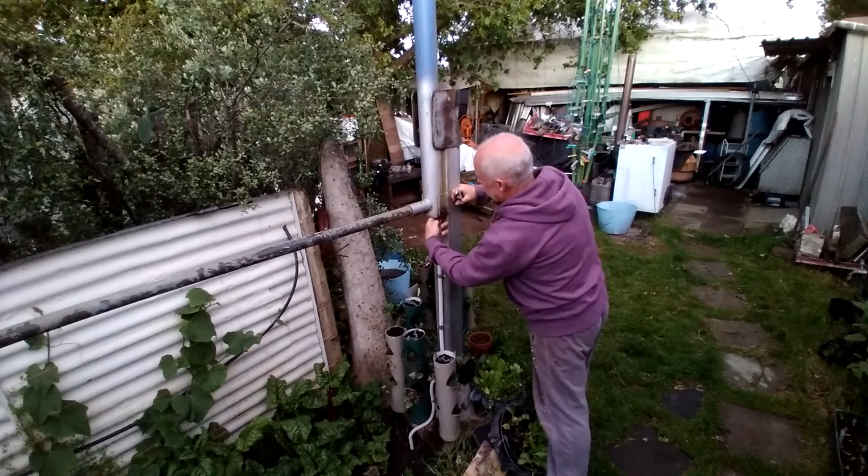One of the mast's guy ropes becomes the lowering rope. The other 2 guy ropes have been disconnected, and now I'm getting the pin ready to take out. I won't remove the pin until I've got everything connected, because if a big gust of wind was suddenly to come up and the pin was out, the whole thing could come crashing down.

So loosen the pin, get it ready to take out, connect up the 2-ton cable winch to the mainstay and take up the slack, and then I can just give it a push with my hands and the mast will start to tip, putting pressure onto the cable winch, and I can lower it the rest of the way with the cable winch with no risk at all.

Trust me, if this was dangerous, I would be down in my concrete bunker down the end of the street with all the neighbours. When I do anything dangerous, I gather everybody into my concrete bunker and we watch it all on the monitors while I get my clone to do the dangerous work. You'll see the clone being built in one of my earlier videos, I'm not going to tell you which one, you'll just have to go look. If it wasn't for the YouTube safety police who randomly roam the comments section of all the videos, I wouldn't have had to build the concrete bunker and gather all the neighbours to watch everything on the monitor while my clone does the work, because I could just do as I like. But because of the YouTube safety police, I have to take all these precautions.

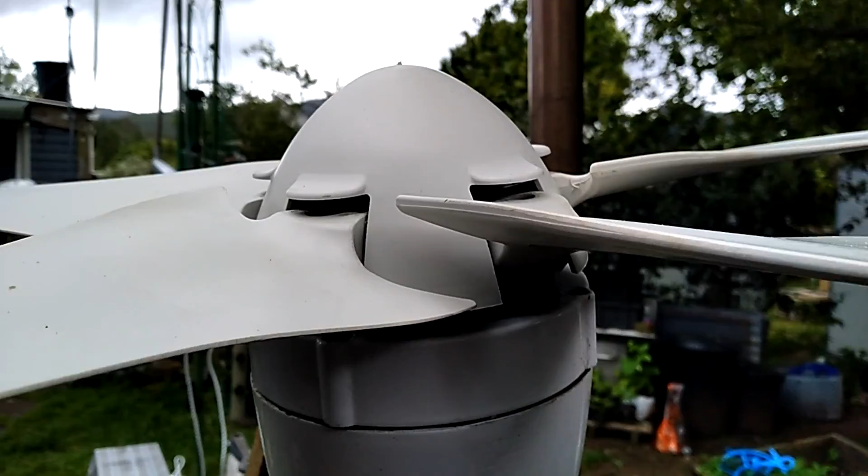So here we go. The first thing to do is pop off the plastic cover, which is done by releasing the clips underneath. On the 5-bladed prop cover there are 5 clips to undo, and on the 3-bladed there are 3 clips. Remove that, put it in a safe place, and grab the large Allen key.

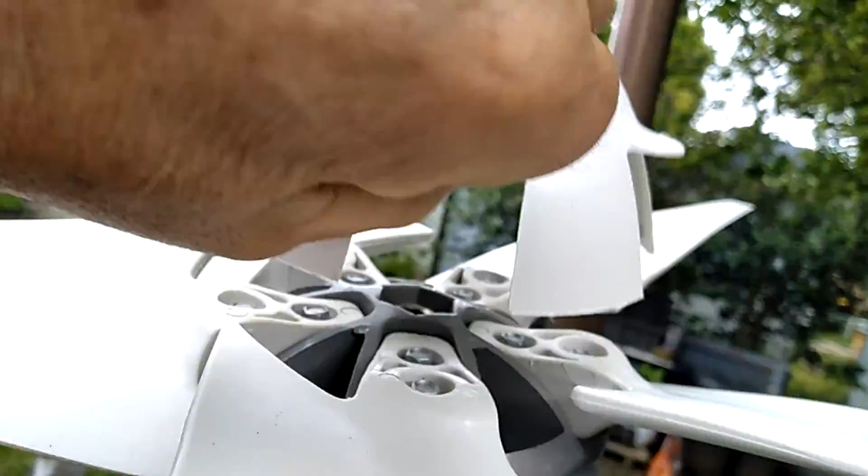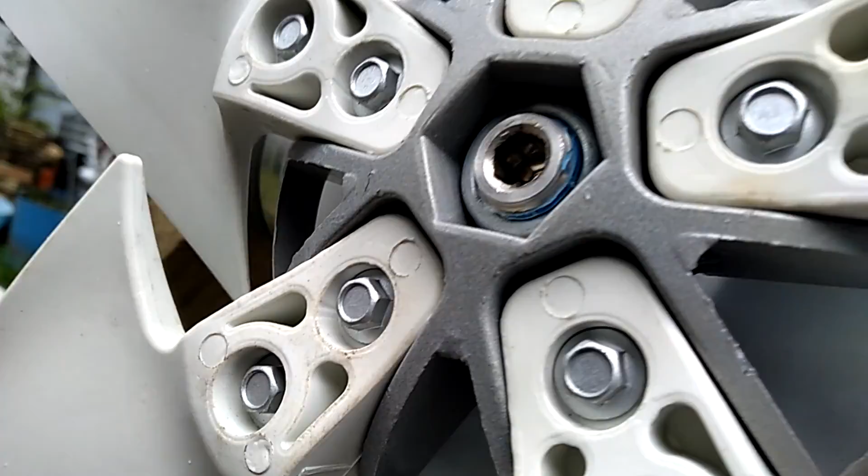Now we're going to remove the rotor. Because we're turning the shaft, not the nut, we have to turn it the opposite way. Instead of righty-tighty, lefty-loosey, it'll be righty-loosey, lefty-tighty. So turning it to the right, I'm actually loosening it because I'm winding the shaft back down inside the nut.

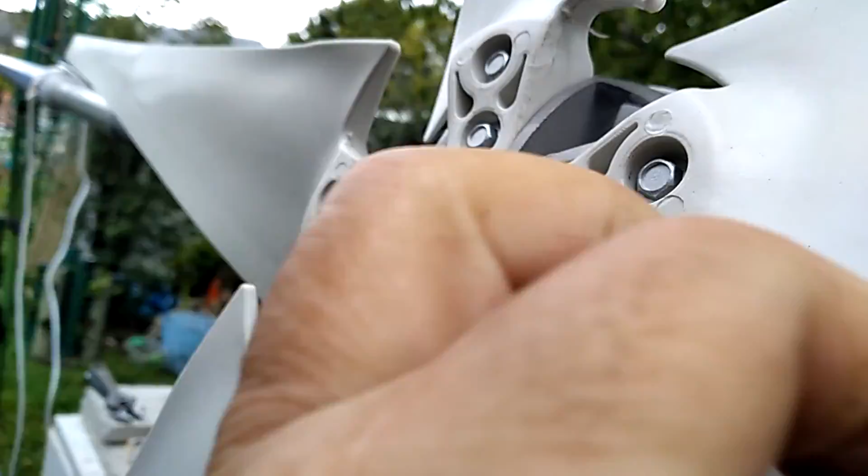Really easy to work on.

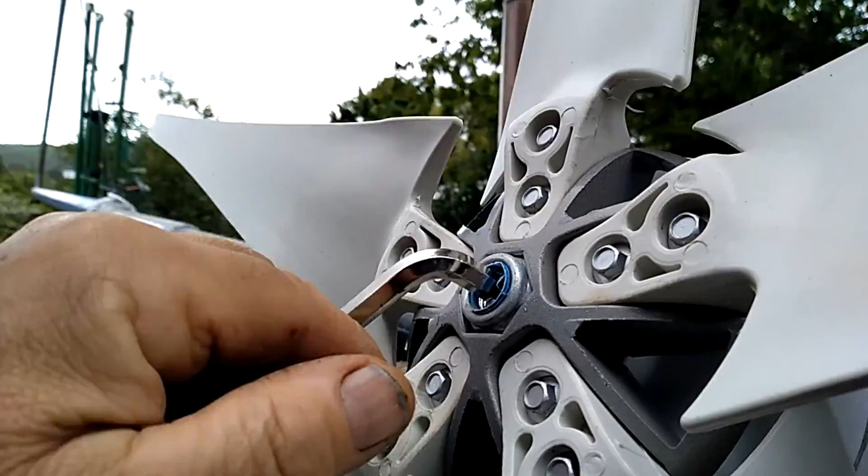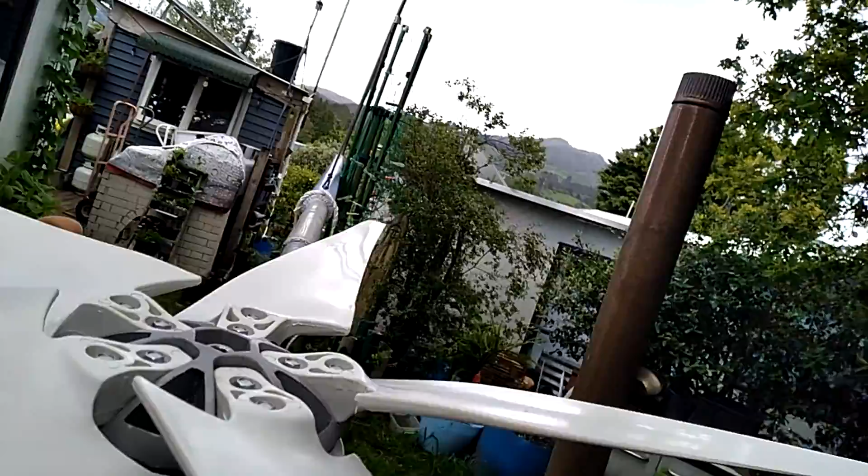So the blade and hub assembly can get lifted off and put down somewhere where it won't get kicked, knocked, driven over or stood on, because it's a fairly well balanced piece of machinery and I really don't want any upsets.

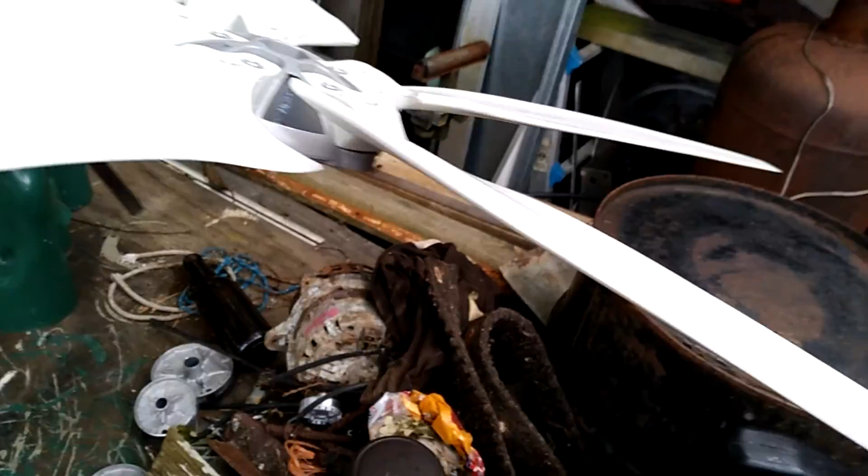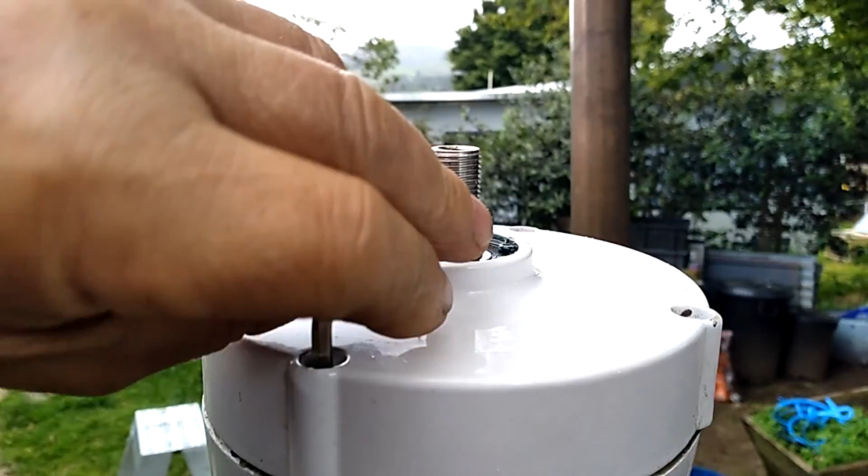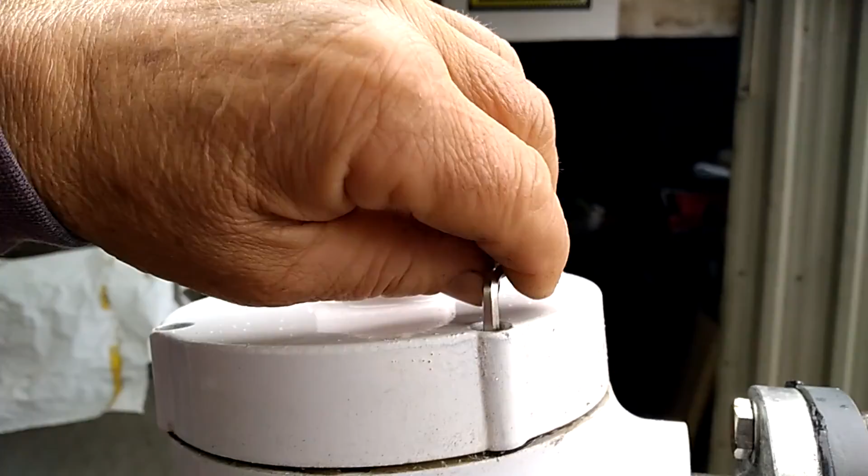Now I'm going to select the 5mm Allen key, which is going to remove the actual stator, and from the stator I'll be able to push the rotor assembly out. Once you've removed those 4 screws, there's an O-ring that goes all the way around, and you must make sure that O-ring stays in the correct position on the outside of the bolts.

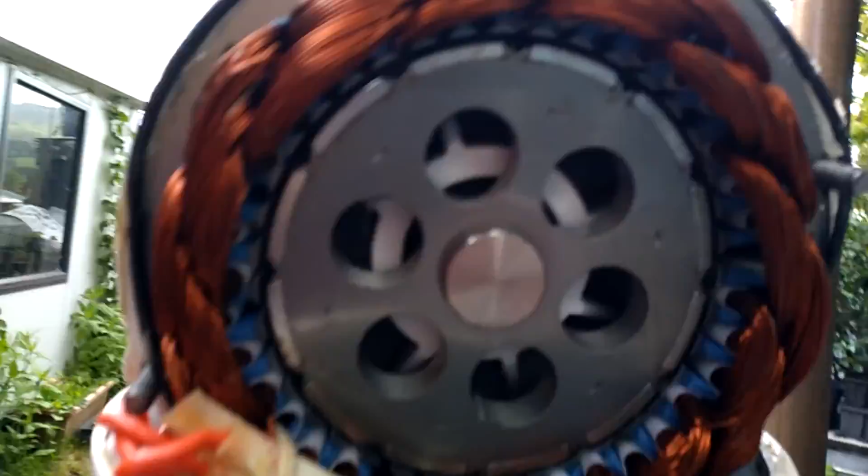Here's the rotor sitting inside the stator. It runs fairly close to the coils - the closer the better. Now you can see the magnets on the outside of the rotor. We can't fit any extra magnets on the outside of the rotor, but we can fit magnets, so long as they're no more than 5mm thick, to both sides of the rotor.

So you just pull the rotor out. That's only held in there by the magnetic force, so you just push against the magnets.

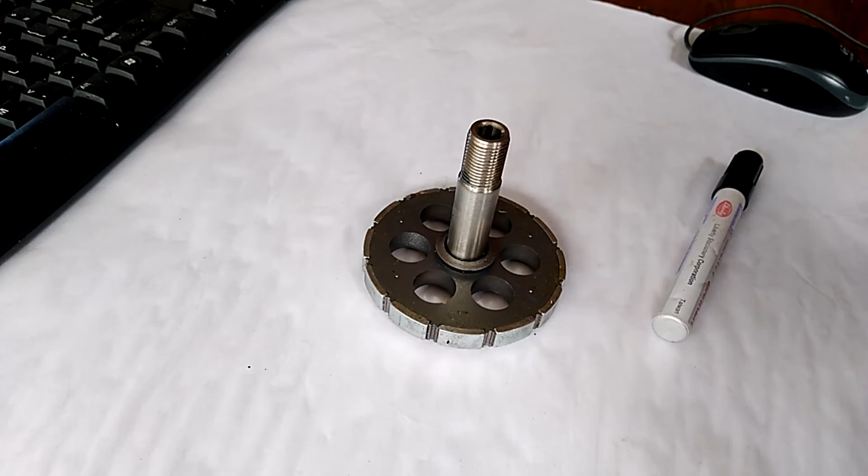Now, I would like to pay tribute to... so right now I would like to pay tribute to the patience and the kindness of all those people who were really excited that I was going to be doing this project, and have waited patiently for several months while I firstly get the thing up the pole, because I've been very busy doing other things, and secondly while they wait for me to get my baseline figures.

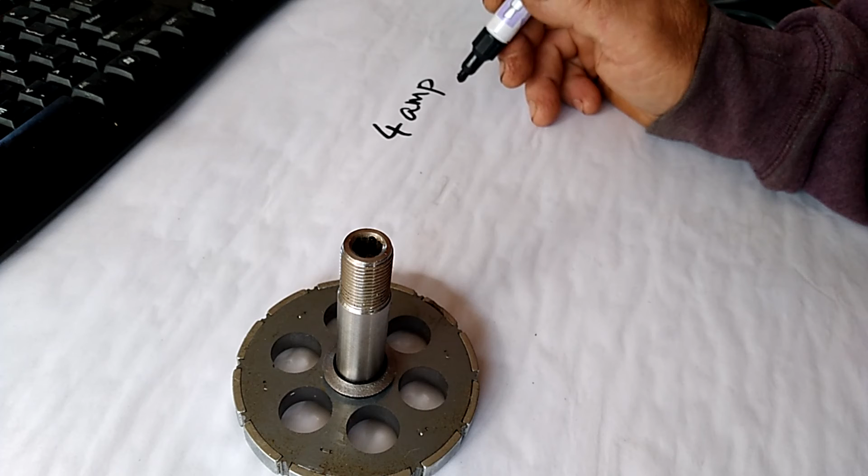Now the baseline figures are nothing exciting. The most I got out of this thing at any stage was a 4 amp charge, and that's nothing spectacular. It was occurring at the stage where the blades were beating the standing wave from the previous blade as the whole thing revolves.

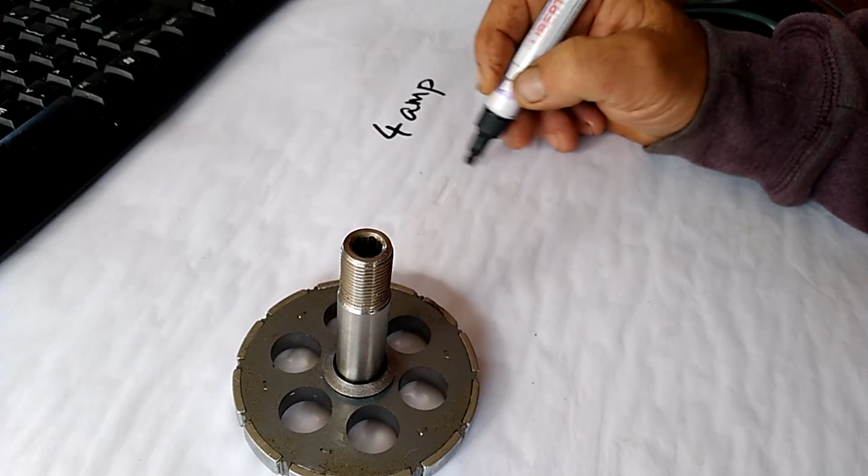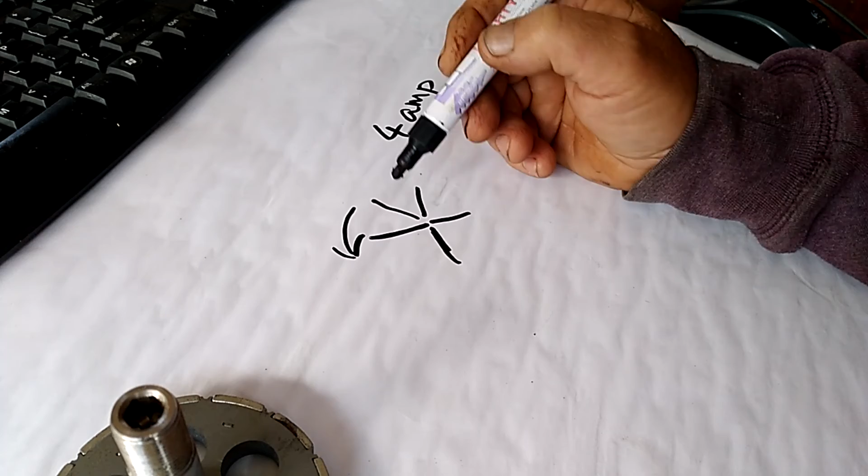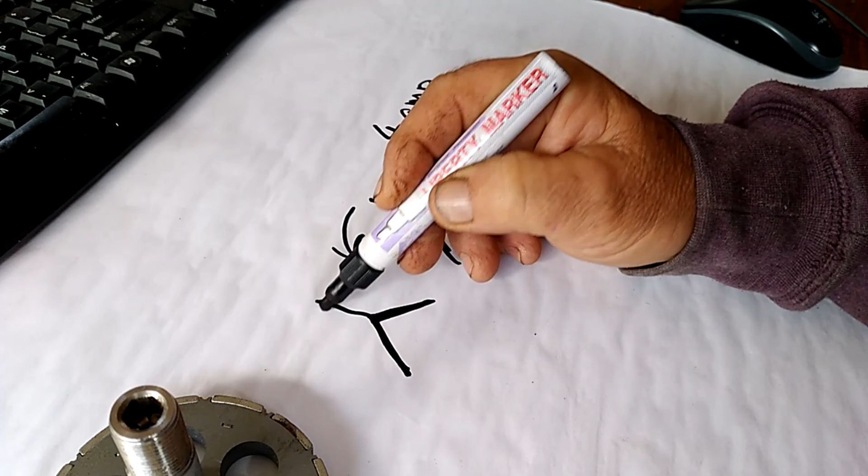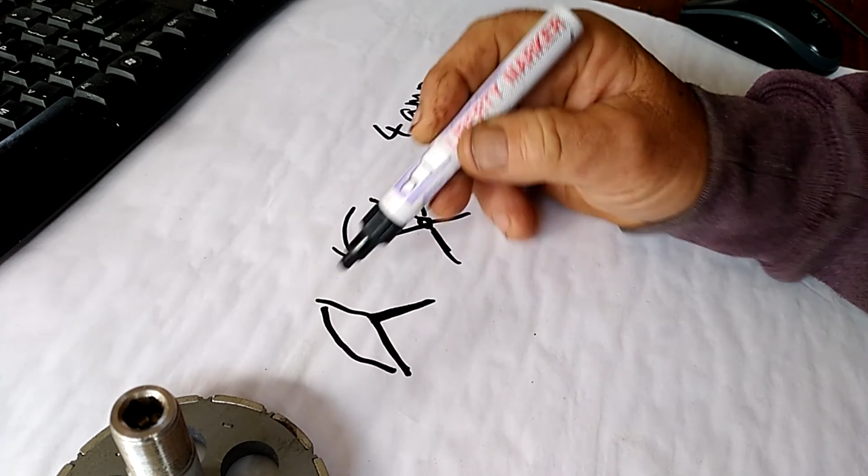Because what happens when you've got a 5-bladed turbine rotating in this direction, for example, the distance between the blades is closer than on a 3-blade turbine, as you can see here. So because they're closer together, when the thing is revolving faster, it means the blade comes round and hits the wave of dirty air left by the previous blade, whereas on a 3-blade that happens at a much higher speed.

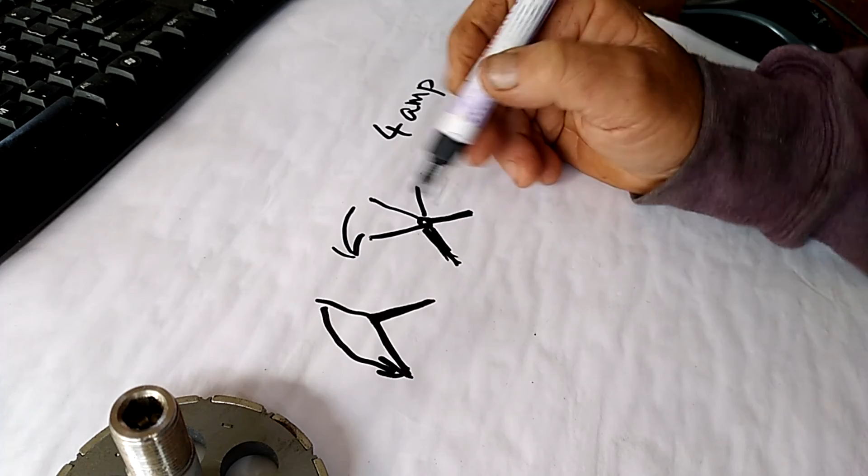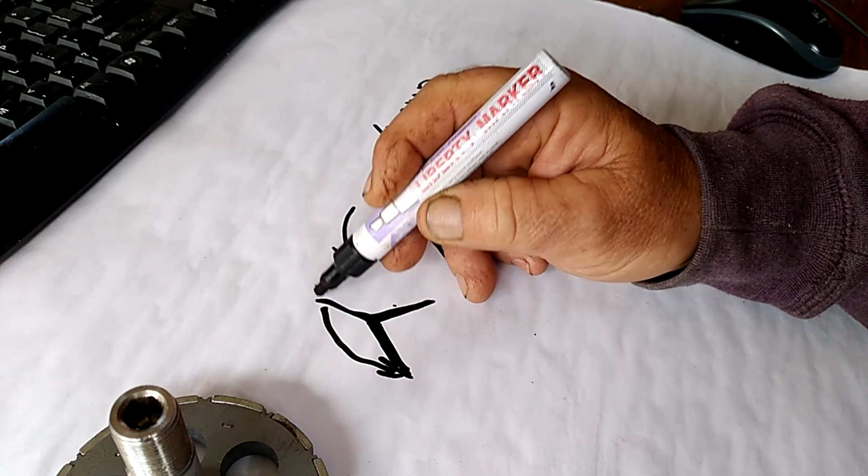So 5-blade is great for my garden where I've got a group of buildings and 2 or 3 really mature trees. This type of configuration is going to go better in lower speed winds, whereas if you live on a yacht or the top of a hill or in a coastal area, you'll probably get much better results with a 3-blade.

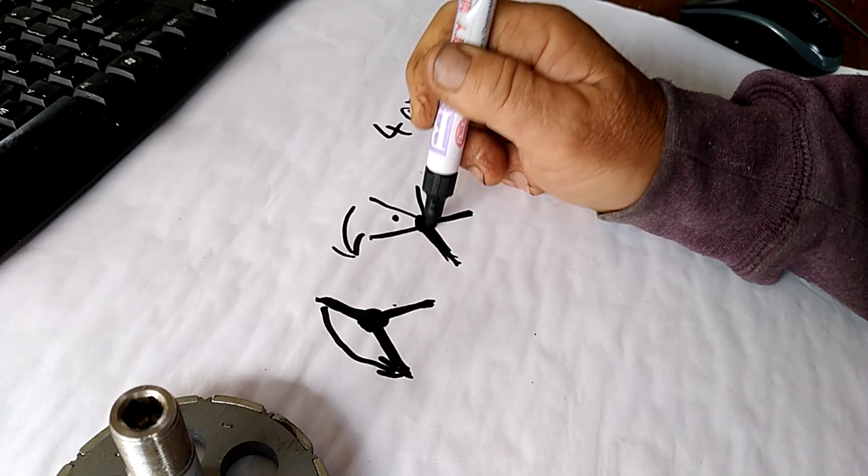I did in fact order a new 3-blade hub from a Chinese supplier who I don't recommend dealing with - I bought it through eBay, but it's not eBay's fault. The problem was that even though I ordered a 3-blade hub, they sent me a 5-blade, so I can't do anything with it. I gave them the option, silly me, to replace the hub with the correct one or give me a full refund, and they chose to give me the full refund. So now I've got to find another supplier and wait another 2 months to get the correct hub.

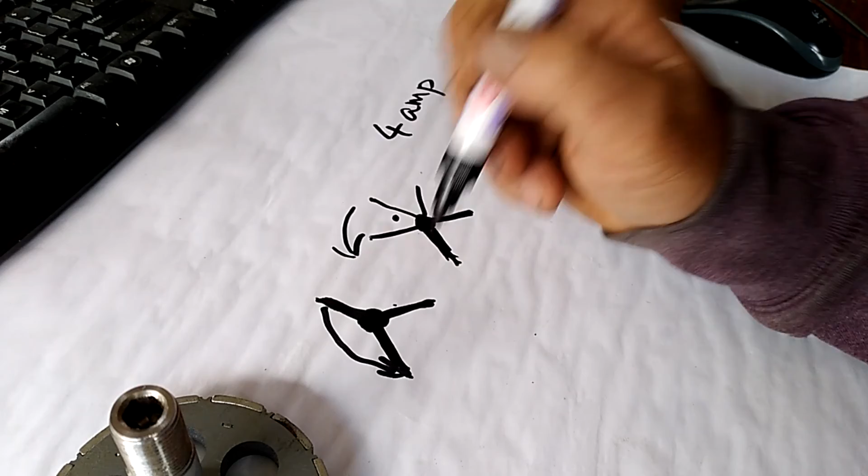So it will be coming down again, and I will be trying it out as a 3-blader, although I don't expect better results in my location.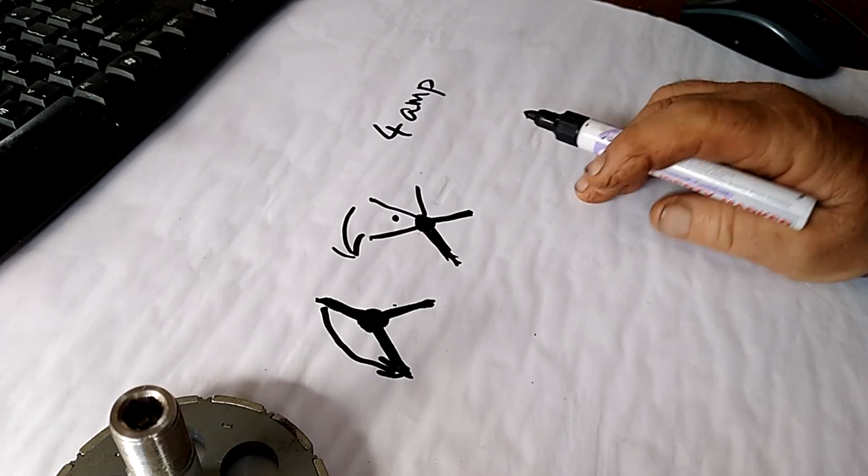So you did see a few minutes ago that the stripping down and removal of the rotor didn't require any special tools - I could do it with a rudimentary tool pack that came with the turbine. The only other tools I'm going to need for this are a texter to draw my little bits of information to explain what's going on, and a kid's compass.

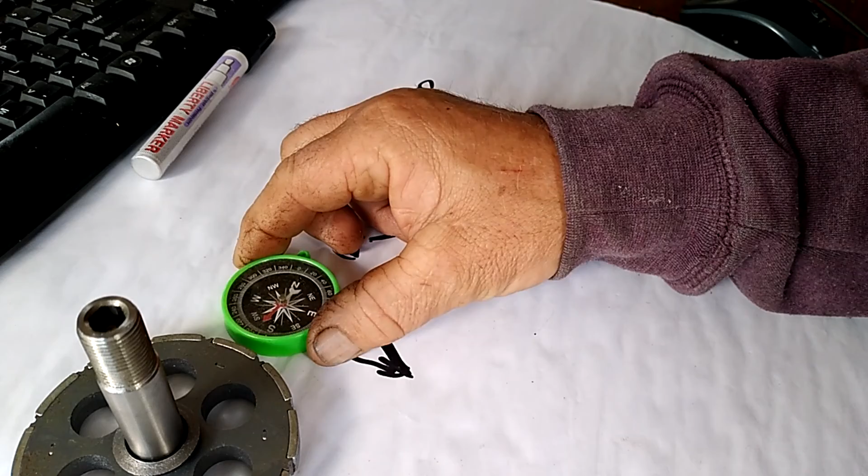And why have I got a kid's compass? That's because I need to find out the polarity of each of these magnets so that I can duplicate that polarity with the new magnets that I'm going to fit to this face here.

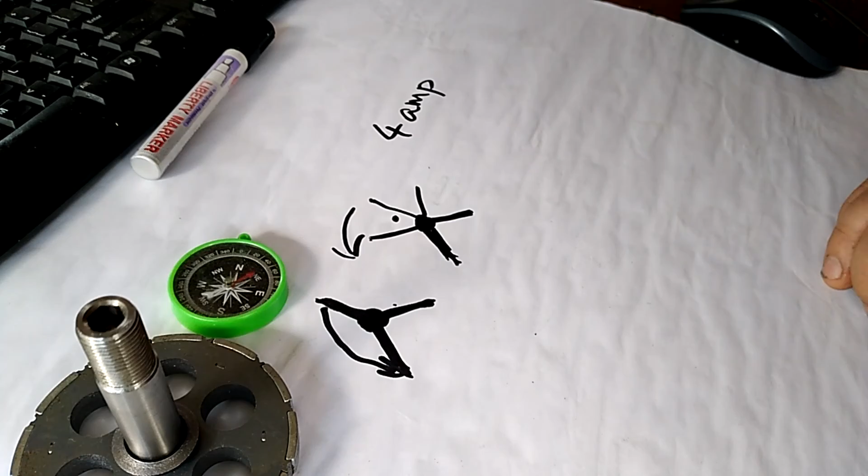Let me show you the new magnets. Now, once again, from eBay, I bought a stack of high-grade neodymium magnets.

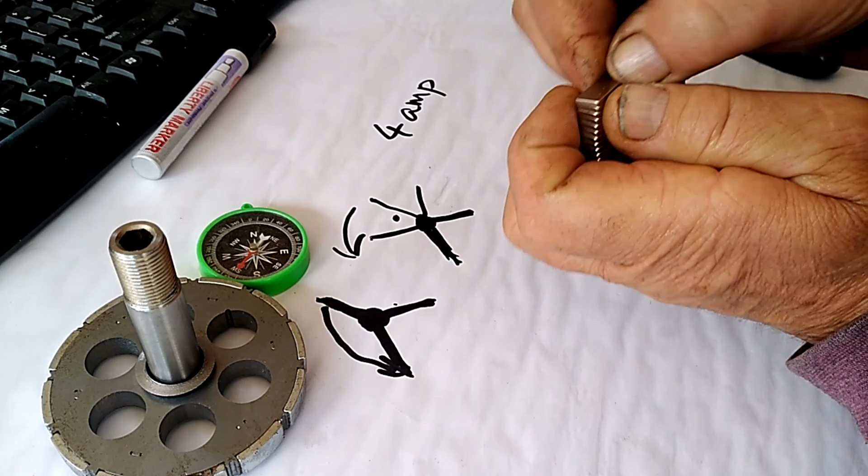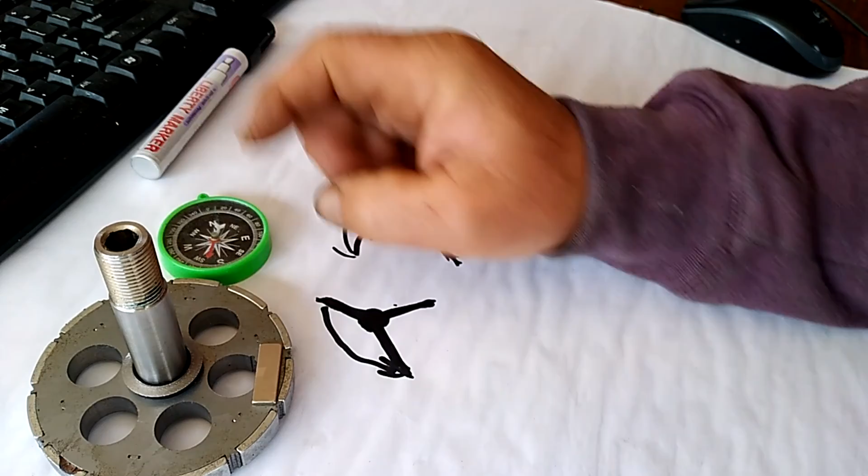I couldn't get the slightly curved type that they use here, but that doesn't matter because I'm going to be putting these magnets directly onto the face next to them. But of course they won't want to stick to the face, they'll want to move towards the magnet, so I'm going to have to give this a wipe down with some alcohol and use adhesive to glue each of these in the correct place.

Now, before we go any further, I want to show you in a close-up here how this rotor is marked all the way around with these dimples on both sides.

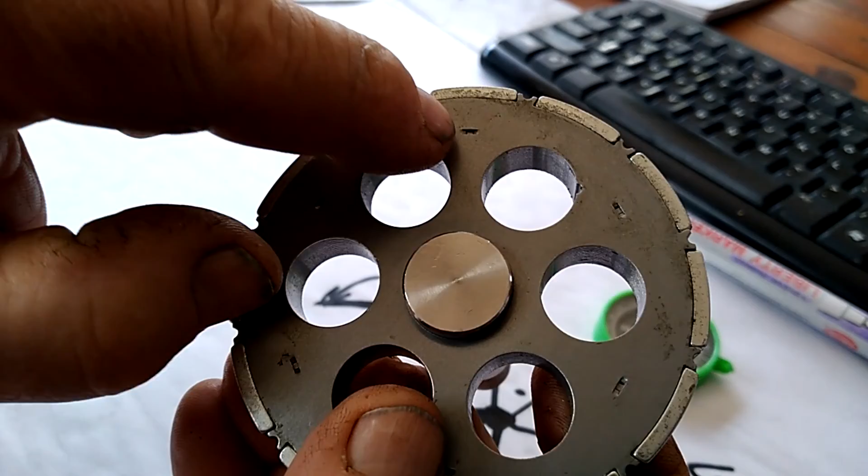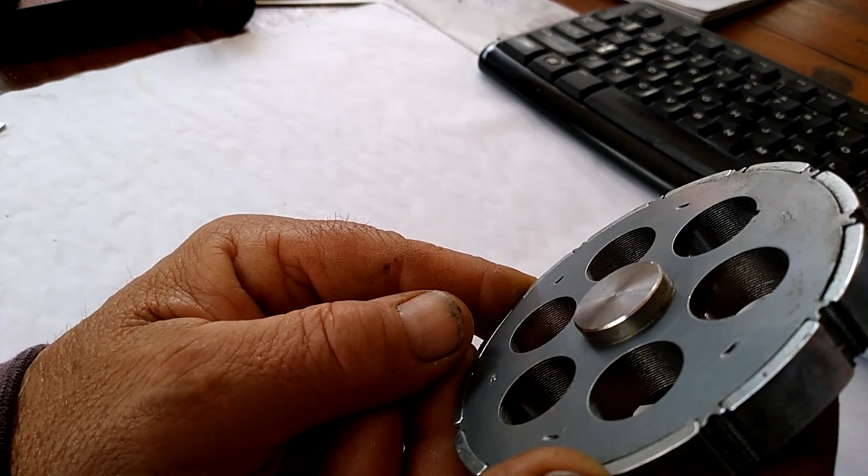And something else you'll see, if you look inside the grooves here, you can see that this rotor isn't made of one piece of steel. This rotor is made of a sandwich of many sheets of thin steel laminated together into a block. The reason they do this is to eliminate or vastly reduce what they call eddy currents.

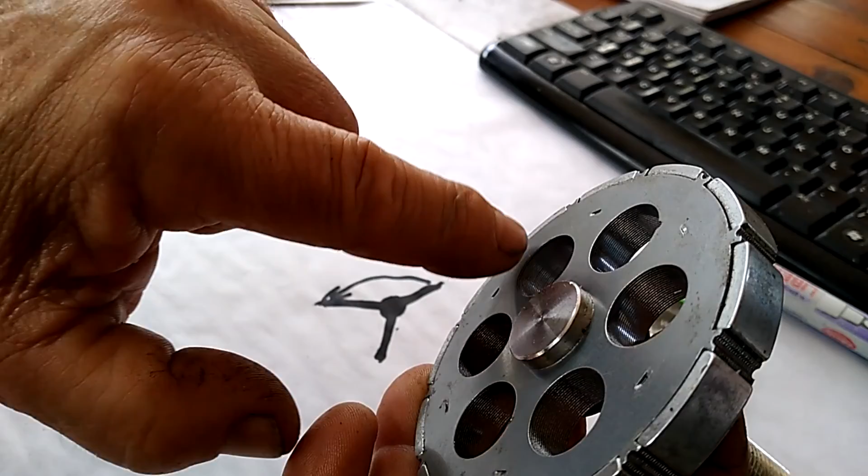Eddy currents are the lines of magnetic flux that go from pole to pole in each magnet. If this was one solid block of metal, the eddy currents would be massive. So they've taken the opportunity to reduce that by making it like a transformer, out of many laminations of steel, and that breaks up the eddy currents and means you don't get so much cogging. That's the feature of a very well-made appliance, that they haven't cut corners - they've used what appears to be best industrial practice.

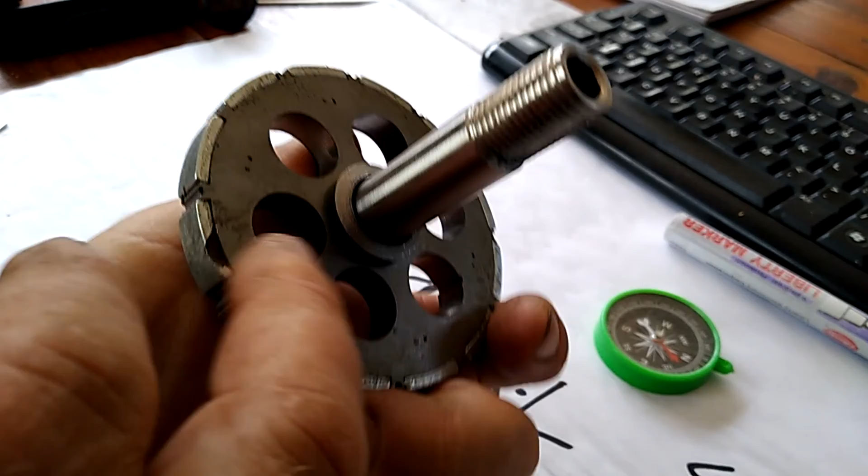Now you'll see that this collar, which has been fitted over the shaft, has then been heavily swaged. You can see how it's deformed by the press that's come down and pressed this at some insane amount of pressure to sandwich all these parts together.

So what I need to do now is identify the polarity of each magnet and mark either the positive or the negative. I don't need to mark both, just one or the other, and we're going to use the kid's compass for that. The north pole of any one of these magnets will of course attract the needle. You'll see the polarity changing as it's attracted to each alternating magnet.

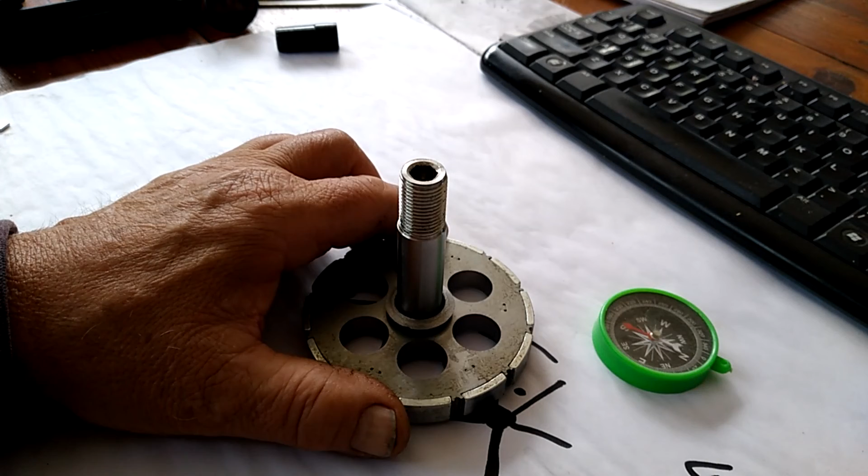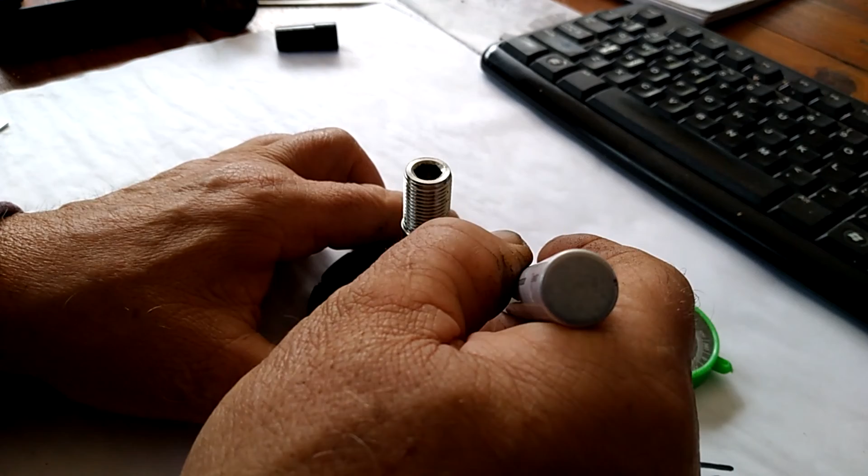This one, for example, is attracting the north pole of the compass, so that's obviously the south pole. We'll put a little S on there, and then the next one is north pole, south pole, north pole, south pole. So we're just going to mark each south pole so we know where we're at.

And I did get quite small magnets because I wasn't sure how much room I was going to have. These magnets are reasonably tiny but very powerful. I'm hoping there's going to be enough room for me to fit each of these, so I'm going to devise a pattern now. I can't put them to the outside like this because they'll hit the coils as it goes round - they must be attached to either of these two faces.

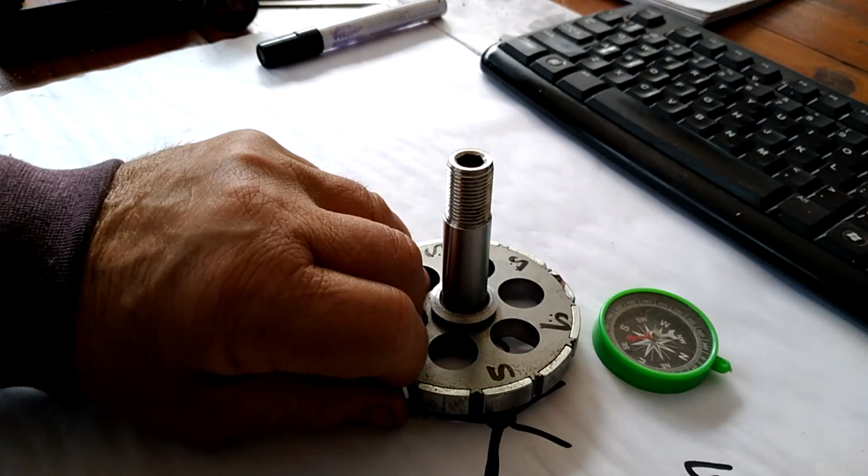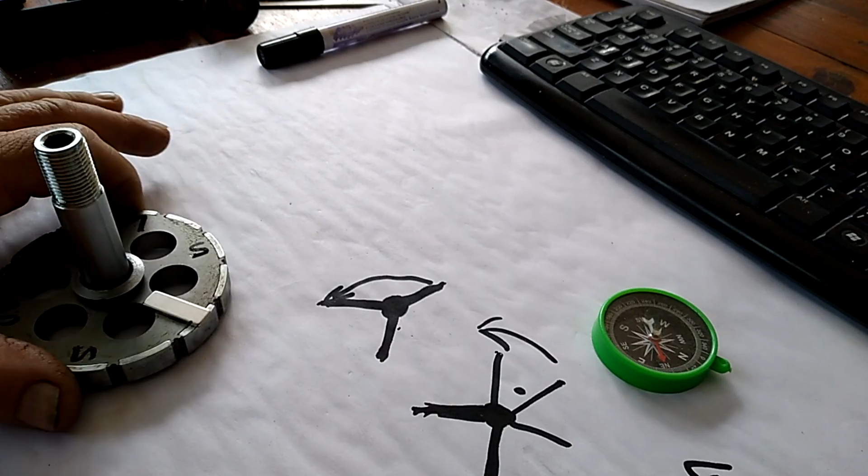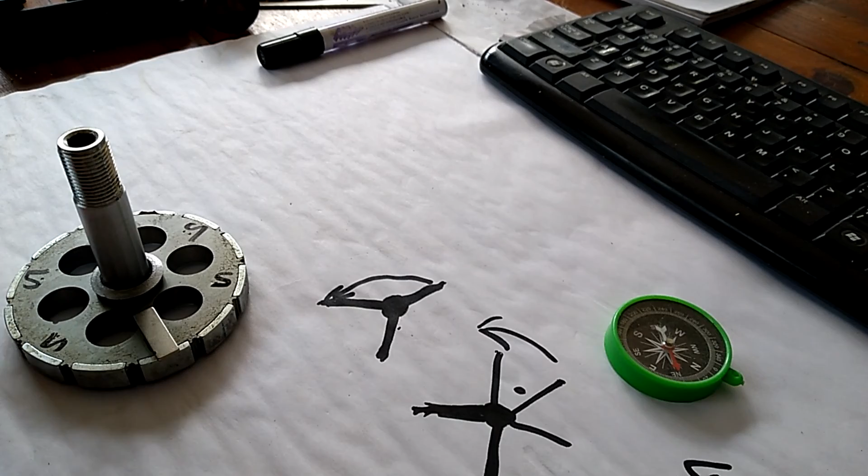This is why we need the glue, because they want to move. This configuration I think will be the most powerful. I'm going to do half the wheel, and then I'm going to pull the rotor away from my compass, and we'll see if one side of the wheel has more pull on the compass than the other. I'm expecting it will, but this is just a chance for us to have a play with it and understand what's going on inside the turbine before I put the thing back up there again.

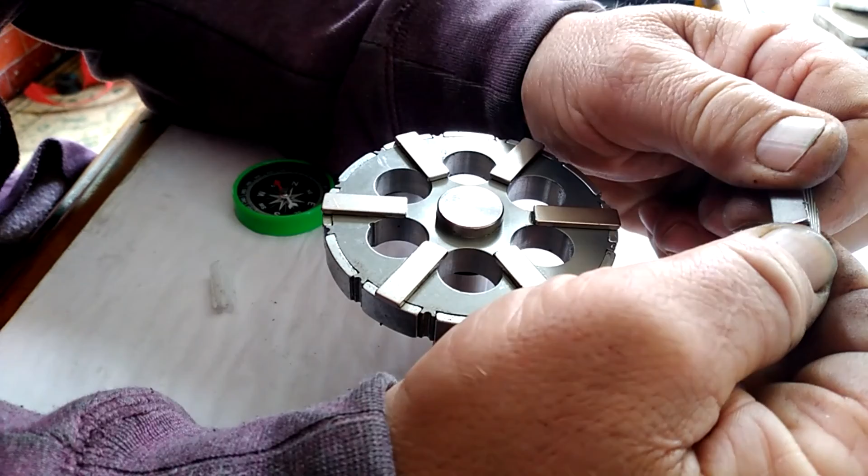Now, unfortunately, the magnetic flux on these powerful magnets doesn't run from end to end - it runs from face to face. That means they're really quite unsuitable for what I'm doing here. But I've also found that online it's really hard to find a seller that tells you whether you have face magnetism or axial magnetism from end to end. So you may have to buy two or three lots of magnets to find the correct ones.

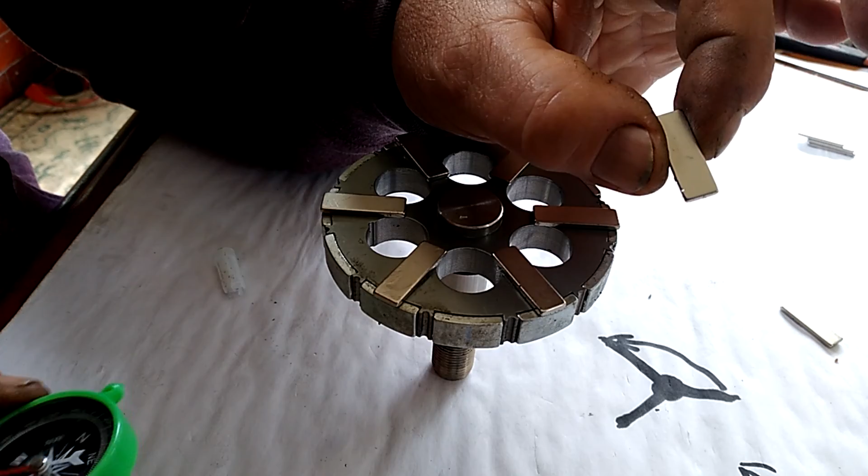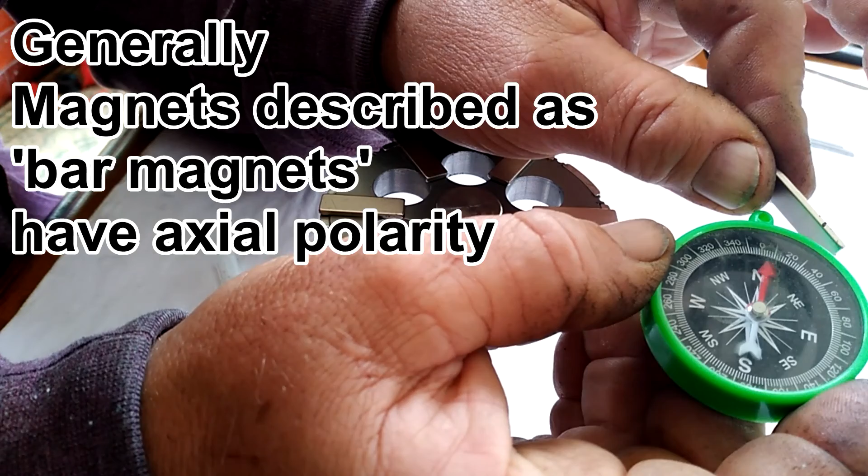You see, it's not the end that's attracting the needle, it's the face that attracts. I'll move this out of the way so we get a clear reading. Here's the end of the magnet having little effect, but as soon as we look at the face of the magnet, there's a dramatic attraction or repulsion to the face, not to the ends. So these aren't the perfect kind of magnet for this project.

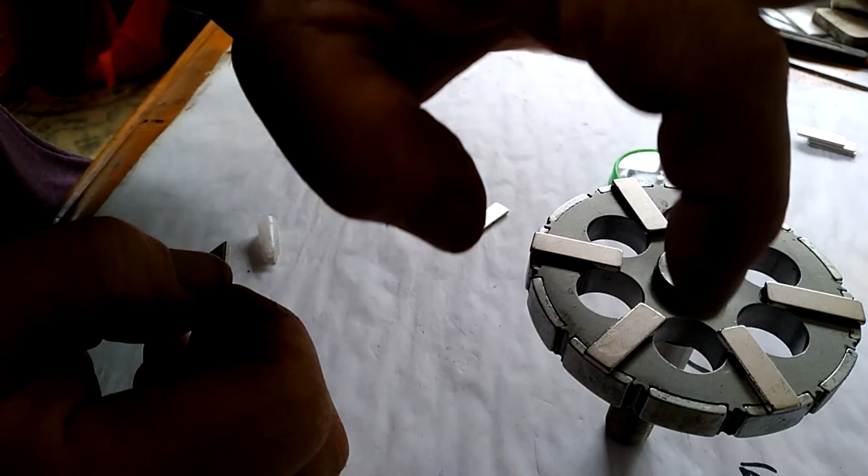But the thing is, it's easy for me to take the thing apart or put it back together again, so I'm going to try it with these anyway. I've just put one drop of super glue under each one of these. That's all it needs, because they're being pretty much held by their own magnetism onto the laminated steel rotor.

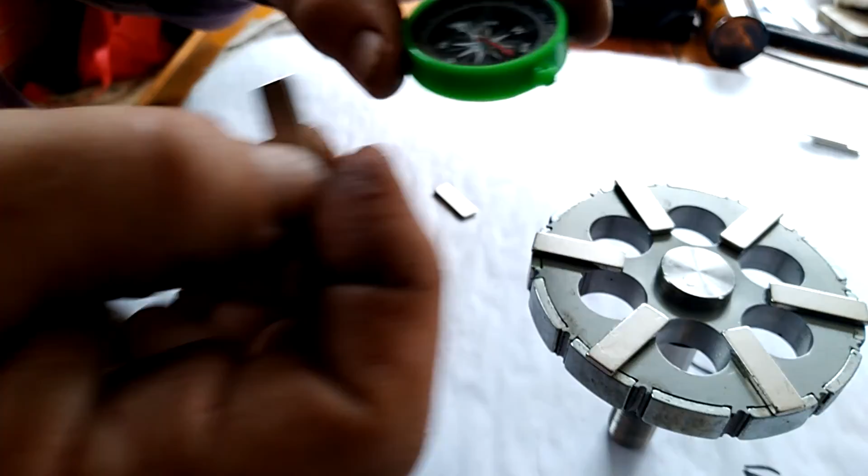But these are all of my north facings. Now I'm going to go ahead and put the south facing one on. I've just got to check - you see, these are all attracting the needle, whereas this way up, this one is repelling the needle. So this is going to be the first of my south poles.

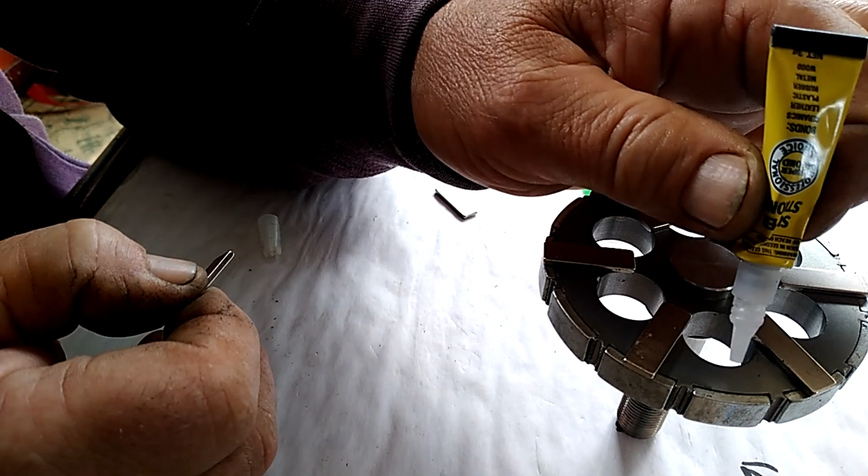And this is where it'll get just a little more likely to slip and slide. So I'm going to put these things on and hold it until the glue's dry. Okay, and on to the next.

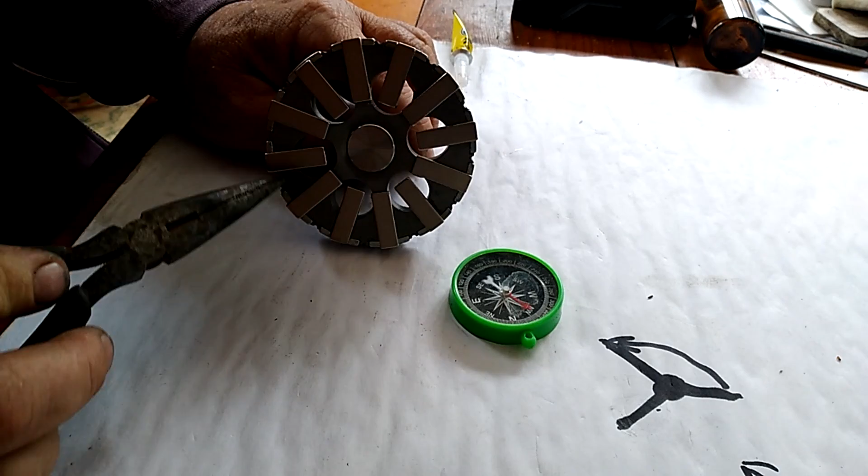So as I say, not the perfect type of magnets. The magnetism is on the face. I really would have preferred it to be on the ends, but it may have some effect.

I'm going to take it back out, fit it to the machine, get it back up into the breeze, and I'll spend the next couple of days looking at the amp meter, watching the speed that it's turning in various wind strengths, and we'll just have a by-the-seat-of-my-pants appraisal as to whether it has improved the performance or not.

In the meantime, I'm going to be looking for the correct type of axial flux magnet to make sure that the strength is on the ends of the magnets and not on the face. We'll pull this thing down again and make the improvement when I can.

So reassembly is just a simple matter of reversing the disassembly procedure. I want to put this into here and it will get sucked in by the magnetic force and pull into the position that it's supposed to be in. So there we go, and that's now...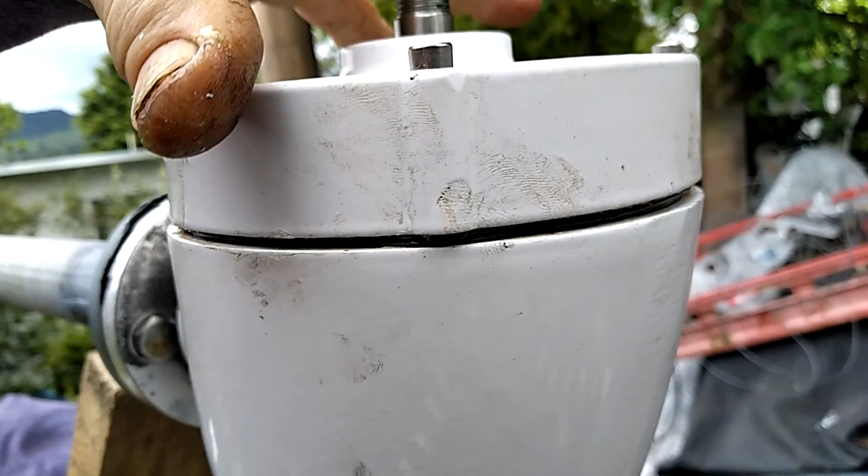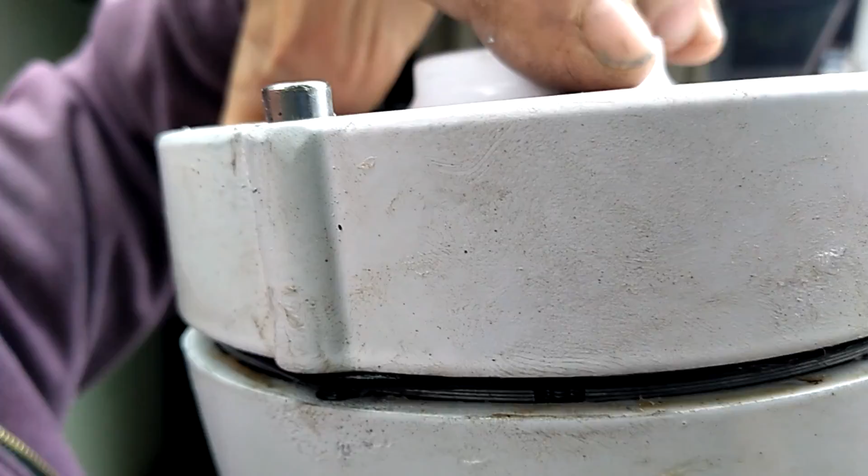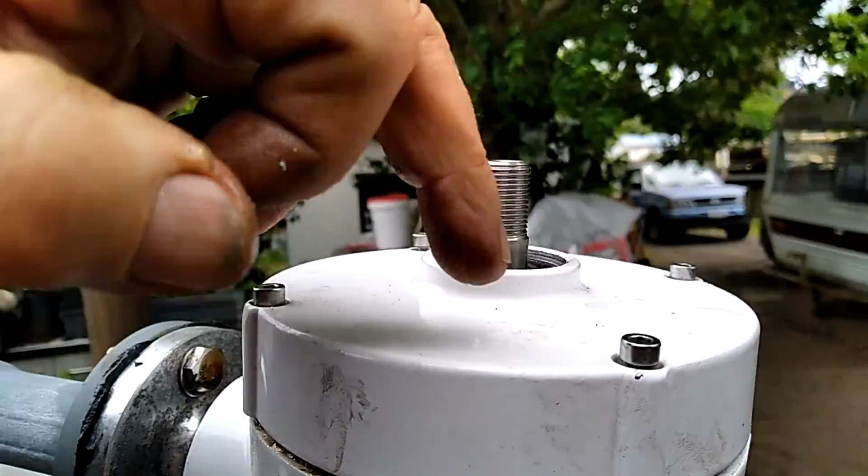Now, of course, it's super duper important that you get the O-ring on the outside of all 4 of the bolts, otherwise you're going to have leakage problems later on. So once you've made sure that that's right, you'll then just tighten these 4 bolts up evenly, bringing it all down smoothly.

Now, you've heard that random noise a few times during this video. Leave a comment down below if you know what it is. I'd love to know how many people know the sound.

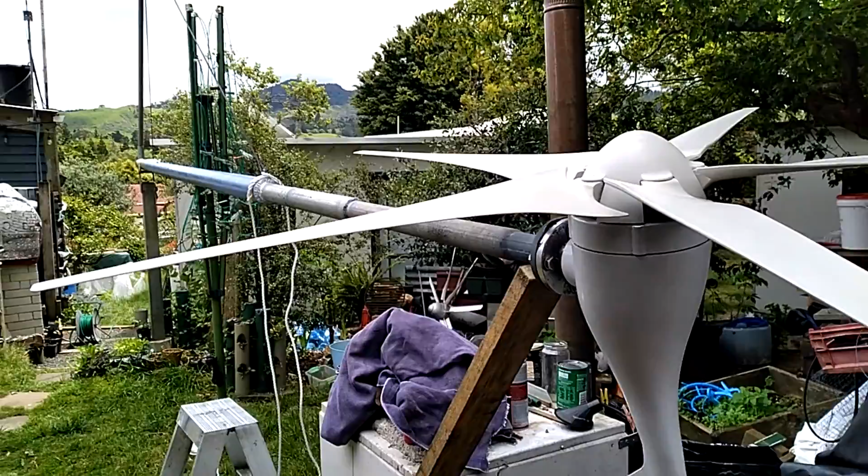Do you see how I've used an ordinary extension lead and its plugs to provide the connection to the mast? Everything I do is as simple as it can possibly be. Keep the cost down and avoid complication.

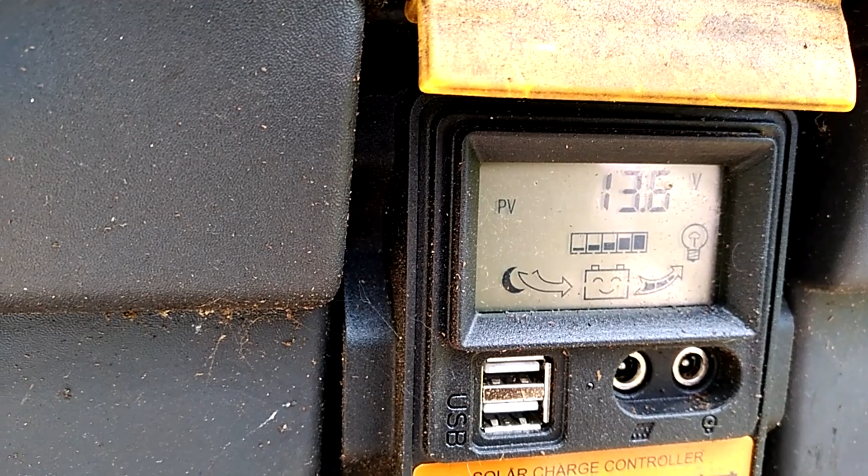Now, down here on the battery box, you'll see that I'm using a cheap, low-cost PWM solar controller. It doesn't really matter whether you use a wind controller or a solar controller. The graphics on this one, of course, show a solar panel and a nighttime. The little picture of the crescent moon on the left-hand side shows that it thinks it's nighttime and it's not charging. When the wind comes up and it does charge, a little picture of a solar panel appears. But of course, we know it's not a solar panel, we know it's a wind turbine.

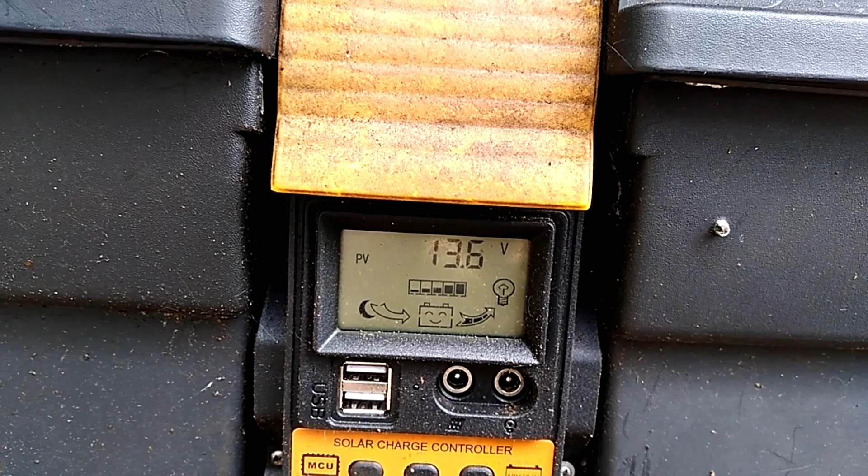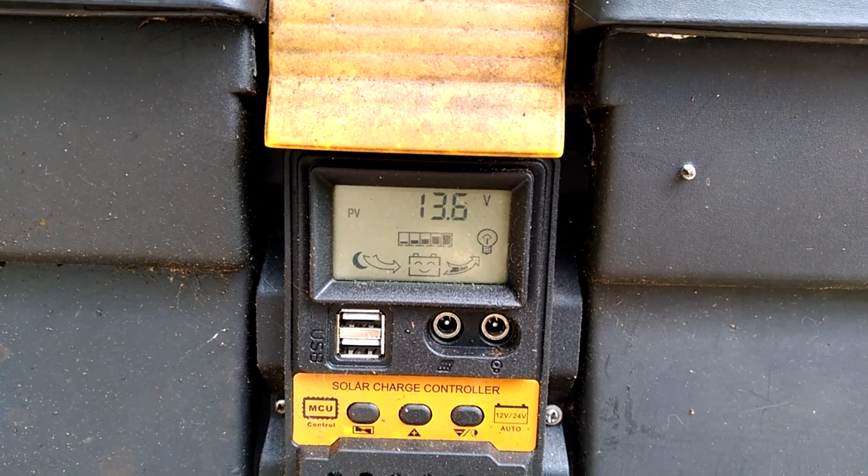The only issue with using this type of controller is that it doesn't have a thermal load - it doesn't have a heating element that will absorb extra power from the generator when the batteries are topped up to 13.6. So if it was a windy day and it was overcharging, I would have to come out and manually turn off the turbine. I do that with a switch to the right of this panel, and that switch is just a simple on-off switch, and it shorts out the terminals and stops the turbine working.

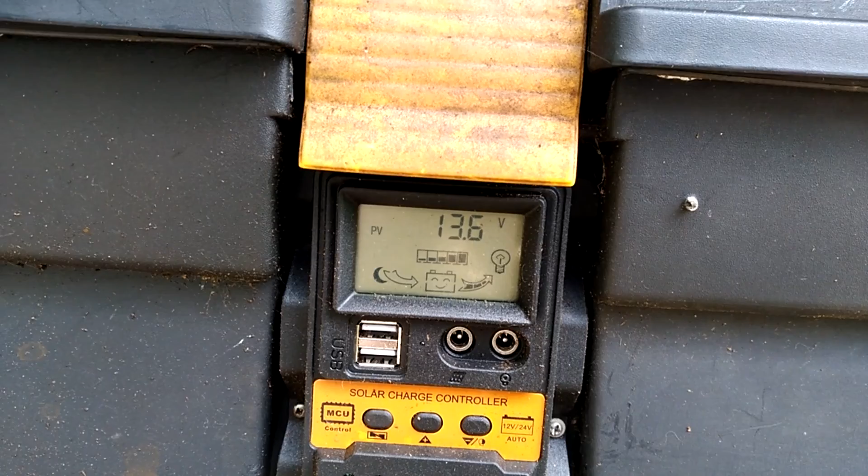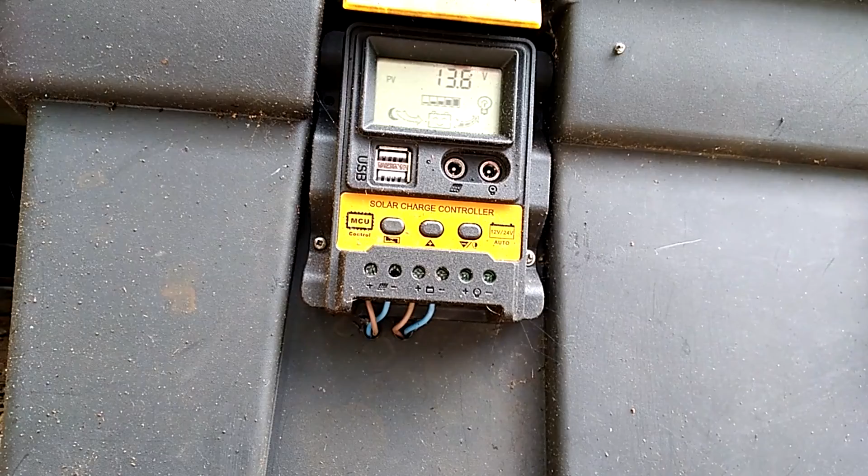Now, although the turbine is turning, because the batteries are already sitting on 13.6, the wind turbine has to get to a fair old lick before it will start charging above 13.6. So we're not getting any charge into the battery today.

If later on in the day, or maybe tomorrow, we get a good belt of wind, I'll come out here and shoot a little bit more footage, and I'll show you how many amps are coming into the battery. I'll give you some idea of how effective the thing is at the moment. If not, that's going to be in the next video, which will be as soon as I get some wind and I can show off my new output.